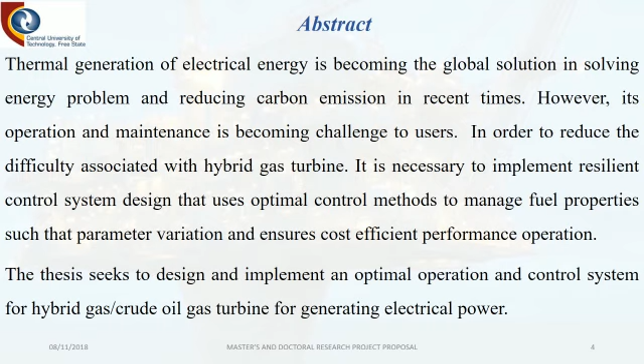What does the thesis entail? What am I going to do? I'm going to design and implement an optimal operation and control system for the hybrid gas turbine power generation system. In order to increase the efficiency and performance of a hybrid gas turbine or gas turbine generation system in general, it is necessary to have a stable controller design, as the type of controller used determines the performance and stability of the plant.

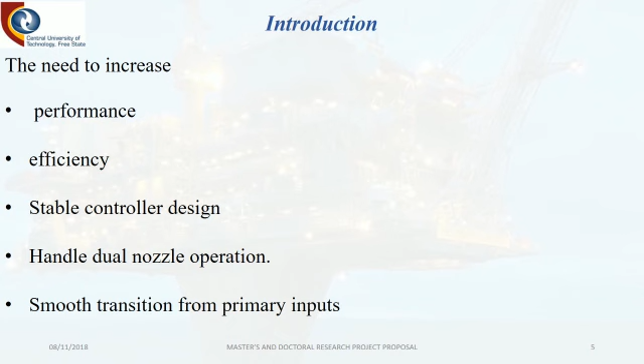The controller design must be able to handle a dual nozzle operation system if the generator is meant for dual nozzle control, and also be in a position to ensure smooth transition from one primary input to the other. In view of that, I've classified the type of controller system capable of such work as an advanced control system, and classified the advanced control system to have some basic features such as intelligence and sensor applications, which will provide reliable data for efficient operation.

Optimization and scheduling for the purpose of monitoring and to ensure that cost-effective set points are being used for scheduling purposes. And above all, it must be able to ensure a management information system, which will bring together all the components within the system and the information they are carrying, and manage the information for the purpose of control decision making.

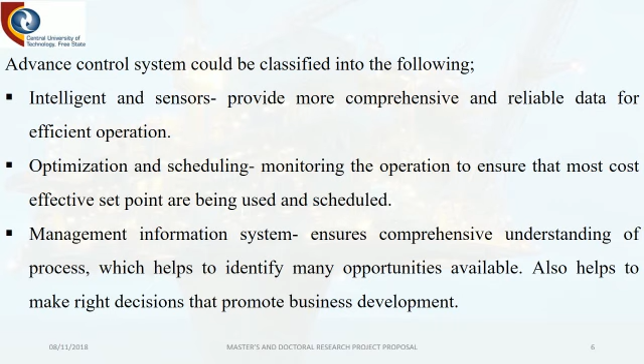What problems does the thesis seek to address? 1. To provide smooth transition between two fuel sources such as gas and natural crude oil. 2. Address the problem associated with plant failure to start after maintenance. During maintenance of a gas turbine, because of wear and tear or because of the rotating parts, most components are meant to be changed at the shutdown state.

These components indeed have their own characteristics which affect the control loop system and require regular tuning in order for the control system to be stable. So indeed, regularly after maintenance, control tuning is required. And if you have a maintenance team that hasn't got the tuning capability, the plants tend to suffer and the cost of maintenance becomes very expensive.

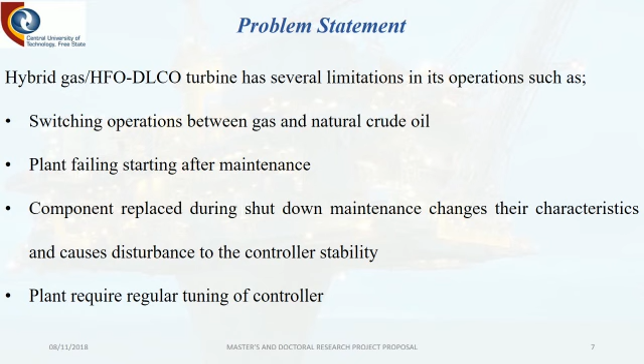So what is the aim and objective of the research? Basically, the aim of the research is to provide best performance operation and control of hybrid gas turbine power generation in Ghana as well as the third world, and also to encourage the use of dual fuel systems for cost-effective management of power generation.

In choosing this topic, it is important to do a literature review in order to be certain that the problem identified has not been addressed by other researchers. So a number of literatures were reviewed along the line of the problem, and I realized that although researchers have made the effort to resolve the problem to some extent, they have not been able to successfully address the smooth transition between the two fuel systems and develop a system where cost also becomes a determining factor of which fuel system to be adopted at a time.

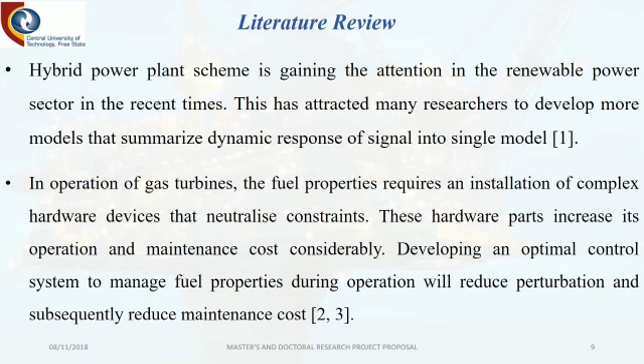it to be able to operate within a certain set point by ensuring that the smooth transition of the fuel from one fuel level to another is successfully achieved, and also the cost of it. So I'm going to operate it optimized alongside cost and availability. So the electronic controller will be

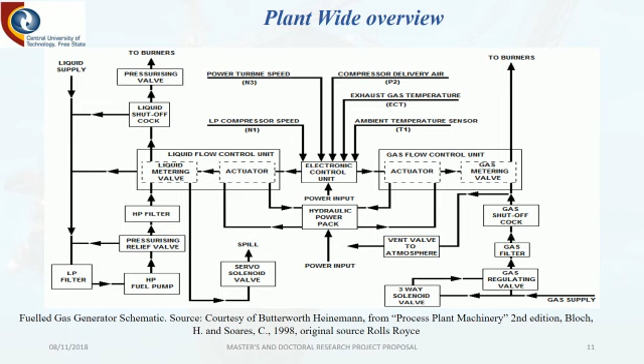redesigned so that when liquid fuel is available, the system will use it. When gas fuel is available, the system will use it. However, the system is also using the cost of these fuels to determine which fuel source should be used at the time, if both are available.

The method used to come out with the whole of this is as follows. I'll do a comprehensive review of the gas turbine plant and its control system, look at the fuel system and its control, understand the principle behind the dual nozzle and the control system, and review the mechanical and thermal aspects of the entire engine.

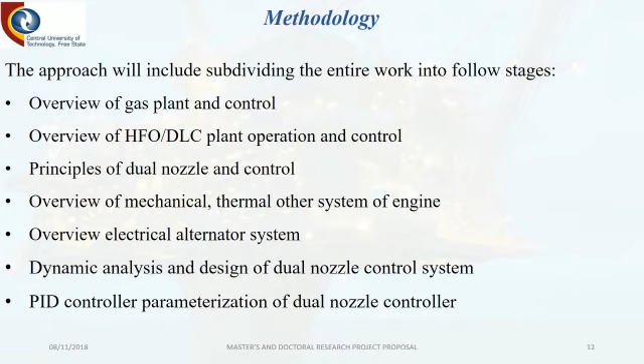Move ahead to look at the alternator system for electrical power production and do dynamic analysis and design of the dual nozzle control system using PID controller parameterization for the dual nozzle control system.

The dynamic approach of the project is we have two sources of supply to the dual nozzle, and the dual nozzle will be designed to allow only one source at a time depending on the availability, and that will be sent to the combustion chamber to mix with the compressed air, which will be pressurized at a high temperature, and that will work on the turbine blades, thereby turning the alternator shaft to produce the electrical output.

All these systems will have to be synchronized and optimized at a particular point so that there is a complete information flow from the power demand to the supply of the primary input sources.

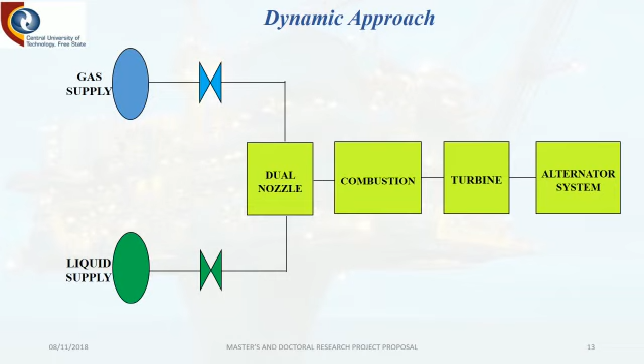After which, an MPC controller design will be made for the dual nozzle system that will be used to shield the PID, and the design will be dynamically modeled and simulated in MATLAB, and the results will finally be analyzed and discussed to see whether it has actually met the objective of the work.

The optimization is a key aspect of the work. So in doing that, I formulate a process to be used for optimization. That is: define the problem, which I have already seen, make numerous assumptions on the problem, formulate the mathematical problem, solve the mathematical problem, interpret the results and solution, put that into the model, verify the model. If the model works perfectly, I'll develop a report and predict the outcome.

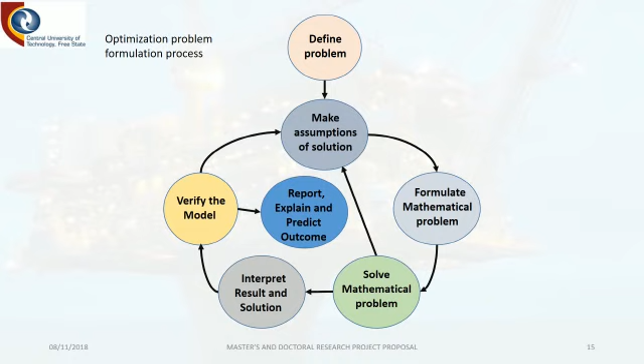If I'm unable to solve the mathematical formulation that I have, I will relook at the assumptions that I made to see whether I'll be able to get the results. And this is the process I intend to use.

In summary, I developed a conceptual block diagram for the whole project, and in the conceptual block diagram, I have PID in the respective loops and an MPC controller providing the most effective set point for the PID and shielding the PID so that the PID parameters are not disturbed. The MPC function here is to use the present and past states to predict the future response that will be fed to the PIDs.

It also has the dual nozzle system, which allows only one source at a time, and that goes to the combustion chamber, mixes with the compressed air, and works on the turbine blades to rotate the alternator shaft for power generation.

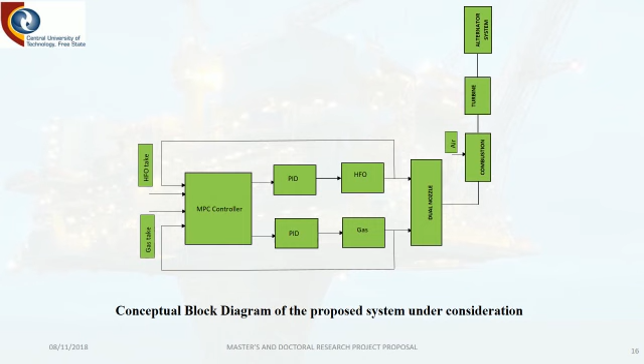In conclusion, the system will have to realize a smooth transition from one fuel source to another, eliminate problems associated with plant operation, address the tuning problem, with an MPC controller designed to protect the PID controllers, and simulate the system to ensure that it is able to handle constraints imposed by the system.